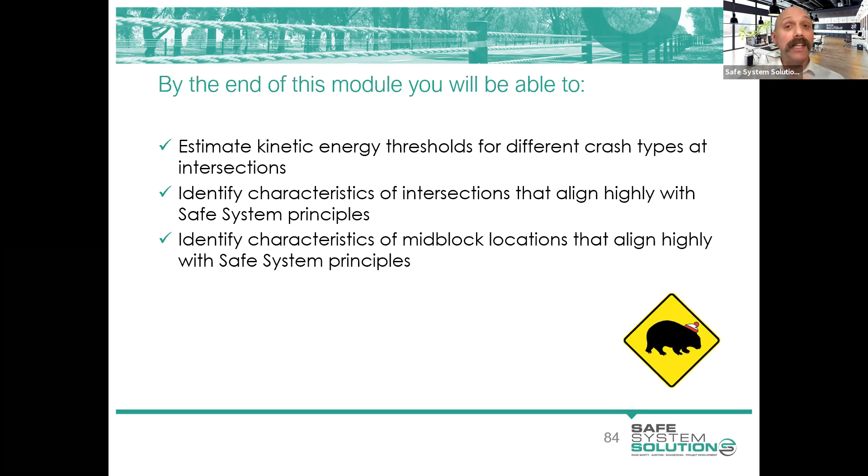So I talked to you, and I showed this yesterday, and I grabbed it from here and I popped it into the first set of slides, which was a little bit not following what your PDF notes are, but I wanted to do it to set that context. We saw road safety audit, design review, safe system assessments, safety and design, and the DDA, or Disability Discrimination Act audits and those sort of things, and the overlap with them.

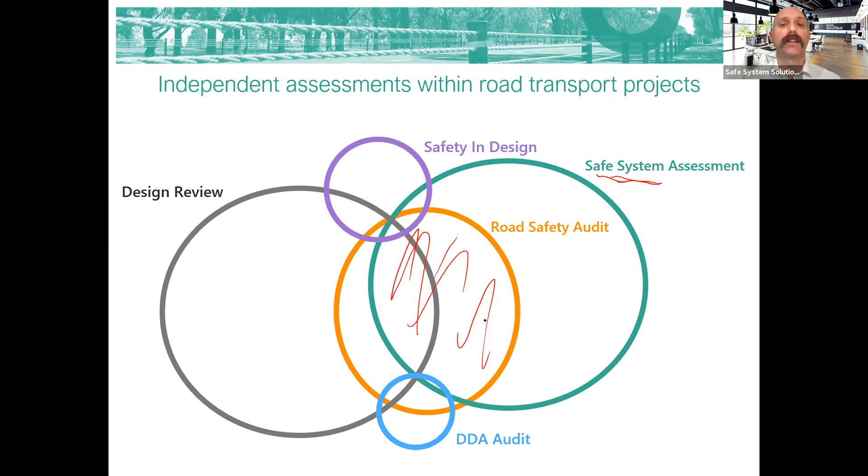And really, we're going to be spending our time today looking at this safe system assessment framework, but some of the stuff you'll definitely see really interacts in there with what you know as road safety auditors, for those that are road safety auditors, and it's very familiar processes, and analysing designs and the network in terms of that safety lens.

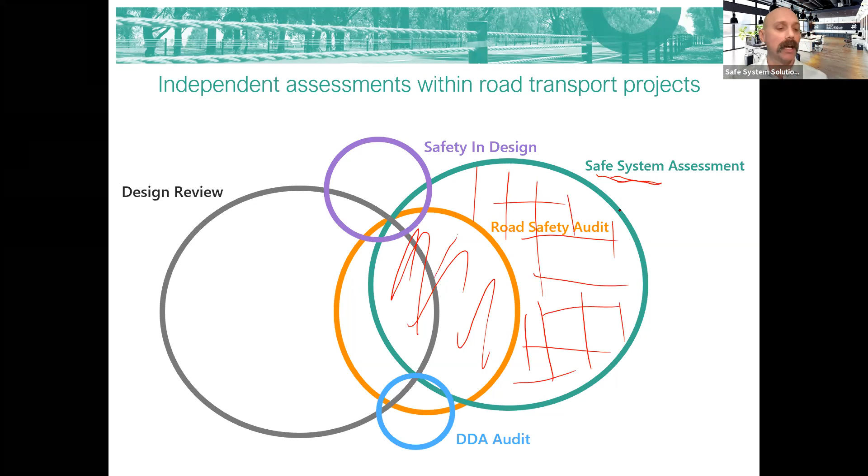The additional stuff out here that isn't within a road safety audit is a lot of the stuff associated with quantifying, scoring, categorizing things, and categorizing both the issues that are being identified, but also the recommendations that are being made into their principal safe system recommendations, or supporting safe system recommendations. We'll get into that, and I think a lot of you will be quite comfortable with a lot of the stuff we're talking about, because it is in the infrastructure space pretty much.

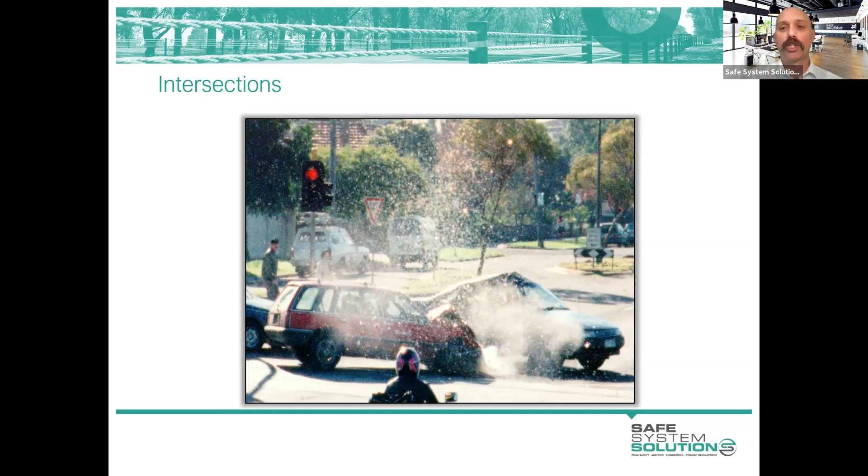Of course, there is interaction between the other elements of the system, which we'll talk about, but the last module was more that general principles and all of those elements, and we've now grabbed an element and we're working with that. So I'm going to start with intersections, and I'll move to mid-blocks shortly after, but I'll be asking you a number of different questions as we go.

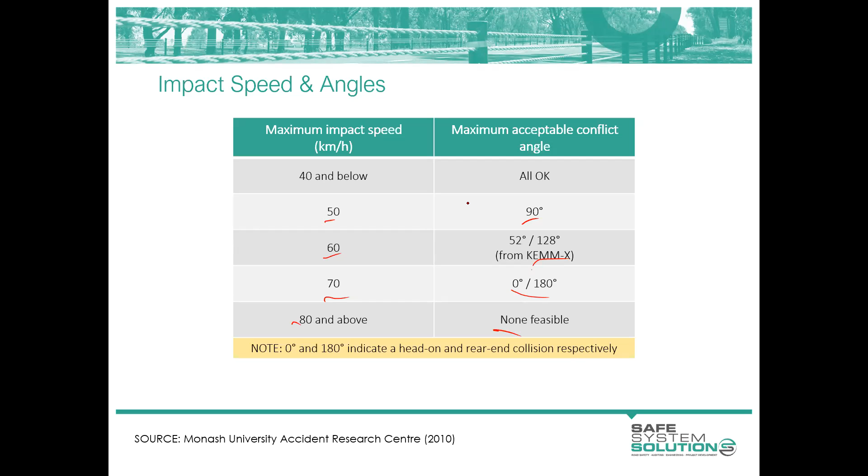Yeah, thanks, Ken. Based on what you presented in the earlier two slides, there has been some discussion regarding roundabouts for safety for cyclists in particular. In the general traffic engineering guidelines, we tend to say that a roundabout reduces the angle of impact, as well as reducing the number of conflict points compared to a normal cross intersection. But if you look at the Bicycle Network website, they say they don't like roundabouts at all in terms of providing safe intersections for cyclists. So I just want to hear your views on those. It's a wonderful question.

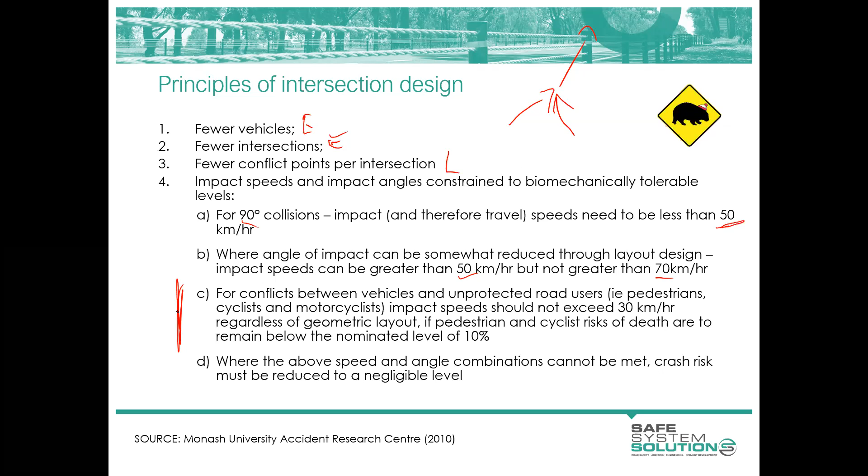And I suppose if you look back to this one, we see there that the cyclists and pedestrians were sat out on their own, and they're not associated with an angle as such. Because you don't get that advantage you get from passenger vehicle angle deflection of energy because of the vulnerable road users. So this table is really just for passenger vehicles.

And then I've got a table, I think, next week where we talk about including the pedestrians and cyclists in there. And really you just take that 30 kilometre per hour as the exponential increase, regardless of angle or the like. There's a bit of work being done in trying to understand some of the severity outcomes of crashes with cyclists in bike lanes or facilities where they're travelling along at speed and they're struck from behind, and how that plays out. But cyclists and pedestrians have a multitude of challenges associated with being run over by different vehicle types. And we can see some fairly low speed things happen that have very severe outcomes.

Yeah, so we'll talk a bit next week about, in fact, next week is all about pedestrians, cyclists and motorcyclists and facilities with them. So I'm going to delve more into that then, but I really appreciate you mentioning it to clarify in everybody's mind. We're talking on this table, passenger vehicle crashes.

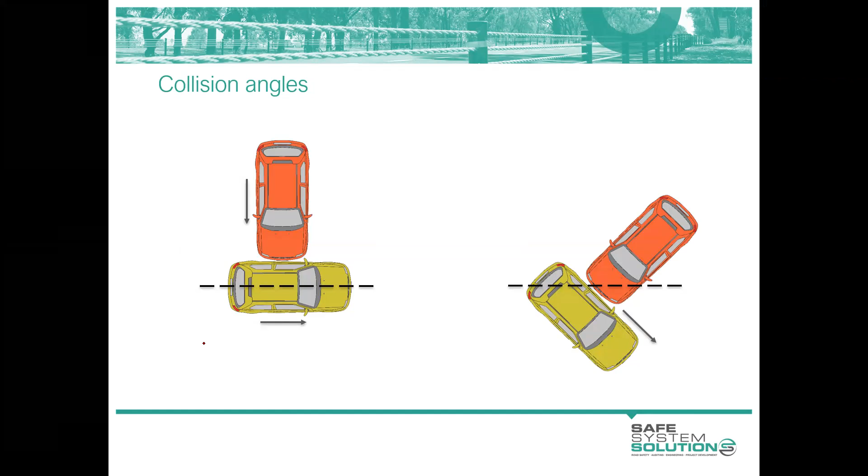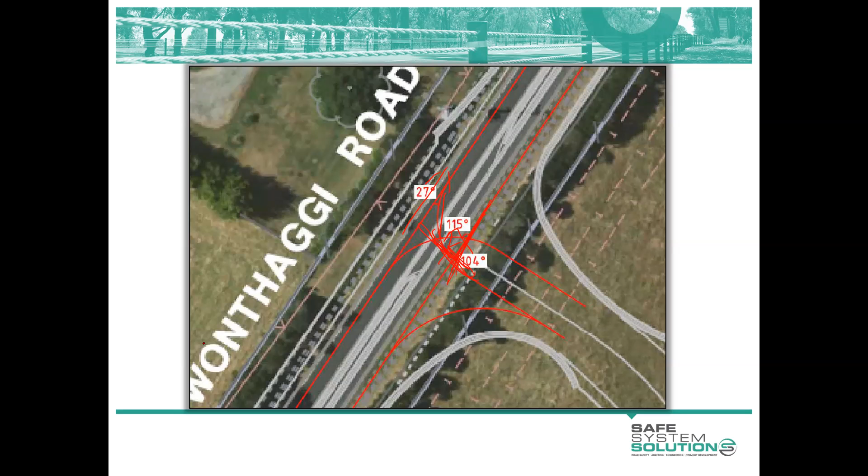There's a comment from earlier on as well when you're talking about intersections where Wade's asking, aren't fewer intersections also fewer conflict points? Well, yes. You eliminate all the conflict points of the intersection you remove in one way or another. So you're spot on, Wade. Absolutely.

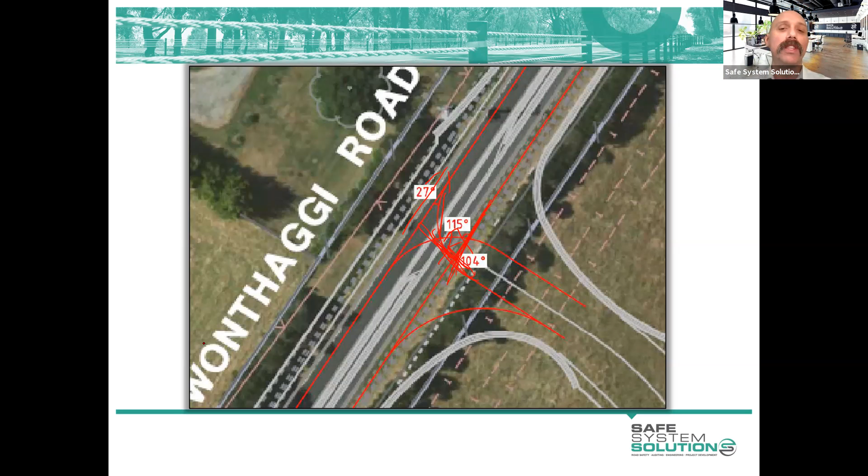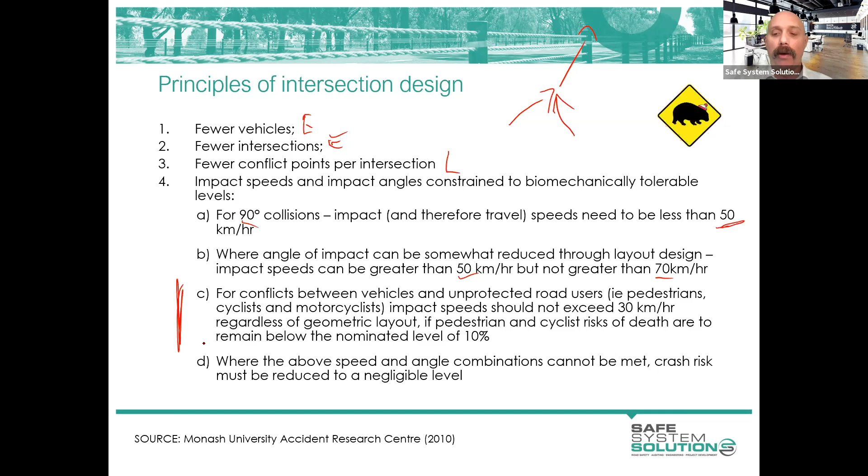I suppose the intent within the MUARC document was thinking more things like making it a left in, left out style treatment, or alterations to make it like a roundabout with less conflict points. So you've got an intersection there, but it's just got less conflict points. But you're spot on. I mean, it's less by going to zero.

Collision angles. So we talked about angles and vectors and the like, but I also just wanted to mention secondary impacts. Often at an intersection we'll see the rate of crashes of lane departure, so run off road or even head on, can sometimes go up a bit. This is because we might get a vehicle that comes out here, and the vehicle with priority then avoids or clips, or there's turbulence at that location, and we often have power poles, signal poles, other roadside features around the intersection, drainage, culverts, and all sorts of things. It's quite a spot for infrastructure.

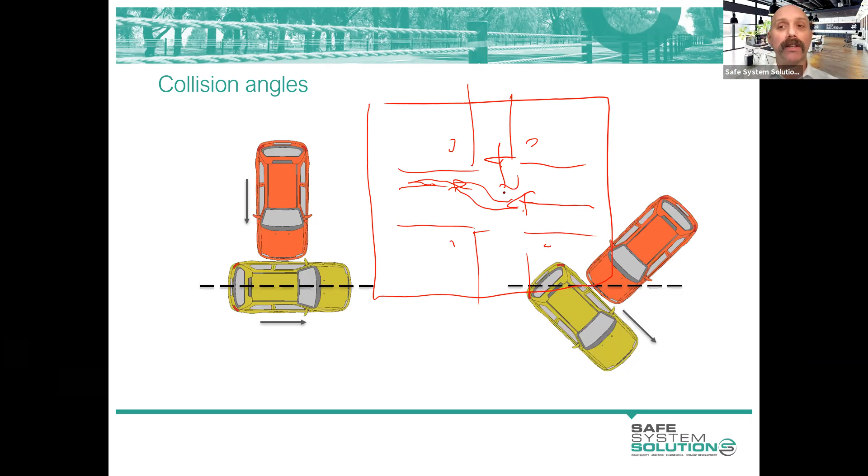And so when you're doing a safe system assessment, while you might be considering the intersection, and there's different definitions of what an intersection is, back to right of way, regardless of that, you're thinking about the crash type. It doesn't particularly matter where it's happened on the network. So if this vehicle went to avoid one coming here and there was a head-on crash, even though it happened right in the intersection, you would categorize and score it as a head-on crash in your scoring matrix. So what we often see if you're doing a route is that the intersections actually step up the run-off-road risk a little bit, as well as the intersection risk.

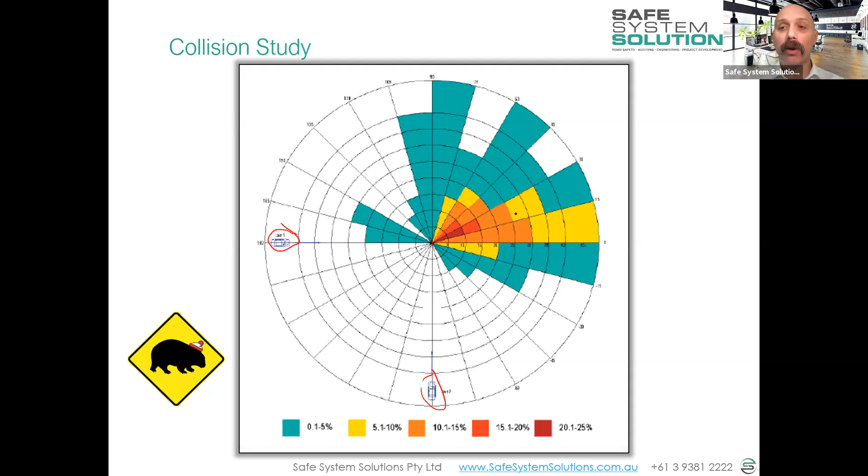The second thing here is a diagram that the Centre for Automotive Safety Research in Adelaide came up with after a lot of investigation of different crashes, and they're talking about secondary impacts here. Here's a vehicle, this is the intersection point, and it's shaded where the secondary impacts are occurring. Pretty obvious stuff, I think. You're going to get the crashes out there, but you do get them in other locations. But there are quite a few secondary impacts there.

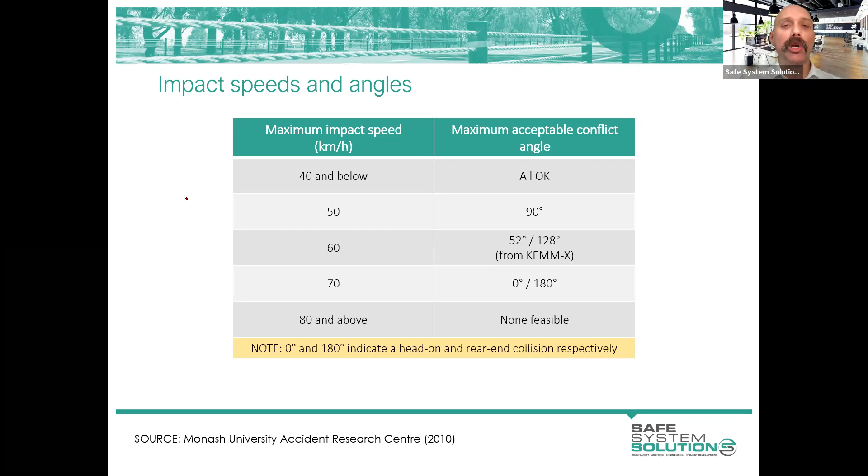So you will be referring back to this and some more information I'm going to provide you to aid you in scoring severity. I'm going to get you to do an exercise shortly, but you're going to have to remember the exposure, the likelihood, and the severity, because what I'm going to ask you to do is come up with ideas on treatments, but put them into the categories of: is that influencing the exposure to crashes, so the number of vehicles that are going through the intersection?

Is that influencing the likelihood of crashes? So features that may influence that are things like the line marking, signage, sight distance, or the like. Or is it going to influence the severity in terms of the speeds, the angles, the vulnerability of road users out there, the types of crash, side impact, or that? Is it a point source hazard like a tree or a power pole, or is it a wider hazard that they might be rolling over, or the like?

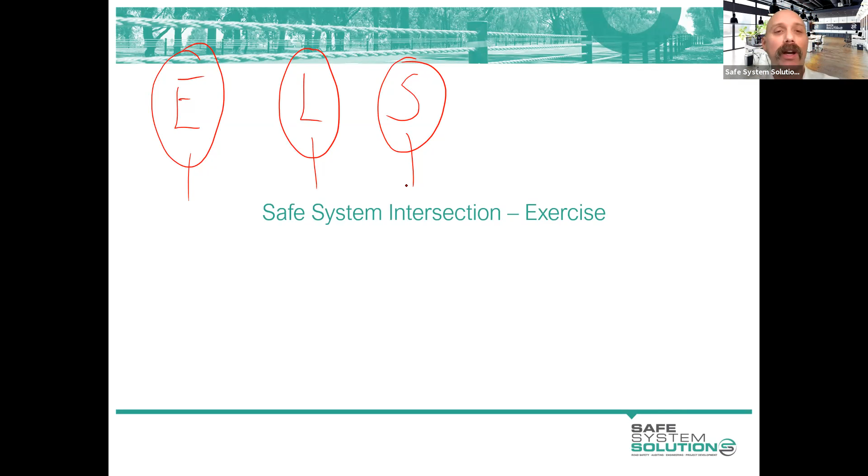So you're going to be asked to categorize anything you come up with. So it's not going to be just as easy as coming up with ideas. You're going to have to start categorizing them. And that's what you have to do in a safe system assessment anyway. So I'm going to use this random intersection as an example. We could have picked anything, but here we go. We've got an intersection here. It's on a major arterial road.

It's got 19,000 vehicles a day. Can I write that there? So 19,000 vehicles a day. It's got 11% heavy vehicles. It's a B double route. It's taken big vehicles. It's got buses. That's a bus stop there. 2 lanes in each direction. 70 kilometers per hour is the speed limit, and the 85th percentile is somewhere around that 70.

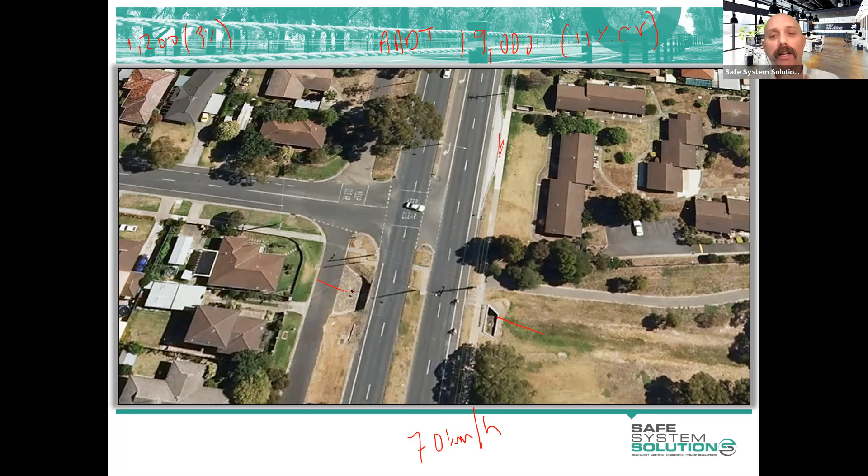So it's generally that. So the side road here is much lower volume, so it's only got 1,200 vehicles a day, and it's only 3% commercial vehicles, and they're predominantly service vehicles, the rubbish truck and those sorts of things, and the buses that go to a school down here. And the school's about 400 meters, 500 meters down the road there. This is a big drainage culvert thing. Looks like a lot of water coming from somewhere that goes under there. This is a shared path facility here.

You can see sort of a bit of a Danish offset crossing here, a Z crossing, as some people call it. And what else can I tell you? This is a 2-way service road here, just really access for the houses. 50 kilometre per hour default speed limit on the side road. Now, what I'm going to get you to do is get this intersection to align much more highly with safe system principles, as high alignment as you can possibly get. But I am going to put some constraints on you. I know you wanted complete freedom to do absolutely anything you wanted, but I'm going to put some constraints on

you. The first constraint I'm going to put on you is that there's been lots of consultation with all these residents in the residential area. Unfortunately, the time it would take them to access via other routes means that we cannot close this intersection. And we can't eliminate those conflict points, as Wade said. We need to actually provide access in all moves. They need to be able to turn left and right out and turn in via left turn and right turn. And they can't go too far up either direction to make a U-turn on the light. So we've pretty much got to leave this fairly open.

That's your budget. And the final one is that you are operating in the current political, organizational, and community environment in which you currently work. Okay, so if you're putting forward something that's very radical, I want a bit of a plan as to how you might actually get that onto the ground, or run that campaign, or whatever you're planning, because that's real world. So I want you to try and think through all of that and come up with treatments, and then categorize anything that you recommend in terms of this will influence the exposure to crashes, or this will influence the likelihood or the severity, or maybe a combination.

Now, does anybody have any questions about the intersection, about the scenario at this stage? We've got some requests for your instant quoting system, Ken. All right, let's do it. Roundabout cost, please. Roundabout's going to be $5.4 million to get a full-sized roundabout at this location. It involves service relocation, property acquisition, big works. 5.4 million. You can't afford a full-size roundabout.

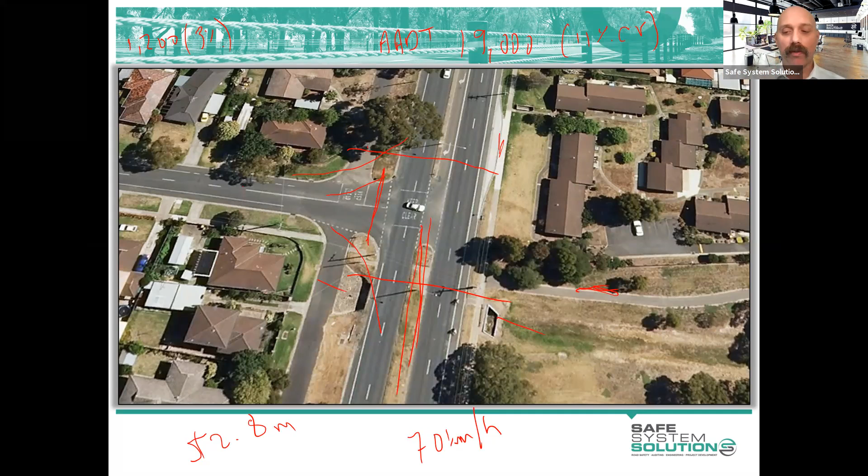A slip lane would actually probably alter the likelihood of crashes up a bit. Slip lanes aren't a real friend in road safety. The addition of a wombat crossing or the like on the slip lane would then bring things back. But thank you all for that input. I'm going to utilize a lot of that input as we go through a few more things, and we'll come back and talk a little more about this intersection. I'm glad most of you have got your head around exposure, likelihood, and severity, because that's the meat of a safe system assessment, really. Well, you have to quantify a few things and the like.

So, a number of you suggested traffic signals. As I said, that is a likelihood influencer. You're less likely to crash at an intersection if it is signalized. But when the crashes happen, they're often just as severe because they are red light runners, sometimes even more severe because they put the foot down to try and get through. People will miss the red light. They will run that red light. The angles are pretty bad. The number of conflict points are there.

You'll notice in my little diagram, which I pop up a lot, that it does nothing for exposure. That's a common mistake when people are getting into safe system assessments, to say, well, if we put a red light, then people aren't exposed to the crash. Well, they are when they run the red light. And that's part of the safe system, to say that people are going to make mistakes. We don't condone it. We'll do everything we can to stop them with good sight lines and LEDs and mast arms if we need. But even if you get all that right, unfortunately, people run the red light, and we need to start thinking about the severity of these crashes.

In fact, here's a little heat map I did of the outer metropolitan Melbourne area out in the southeast. I just picked a random one. I could have done this for any city in Australia and any outer metro area, basically. This is fatal and serious injury over a 10-year period, I think. But look at the hotspots. These are all signalised intersections. That one, I suppose, is the approach to a signalised intersection. We know the biggest source of death and serious injury at intersections across the country is large signalised intersections.

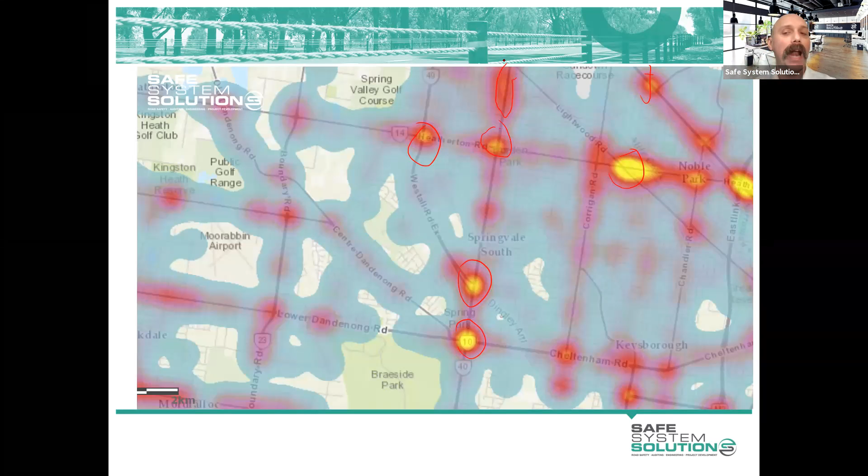And a lot of you popped in signals for some very thoughtful, I suppose, knowledge in a traffic engineering sense. But are we thinking about the outcomes there? Some of you started out by wanting a roundabout. And as En said there, the roundabout is an advantage from a road safety perspective in terms of lessening the conflict points, improving the angle of crashes,

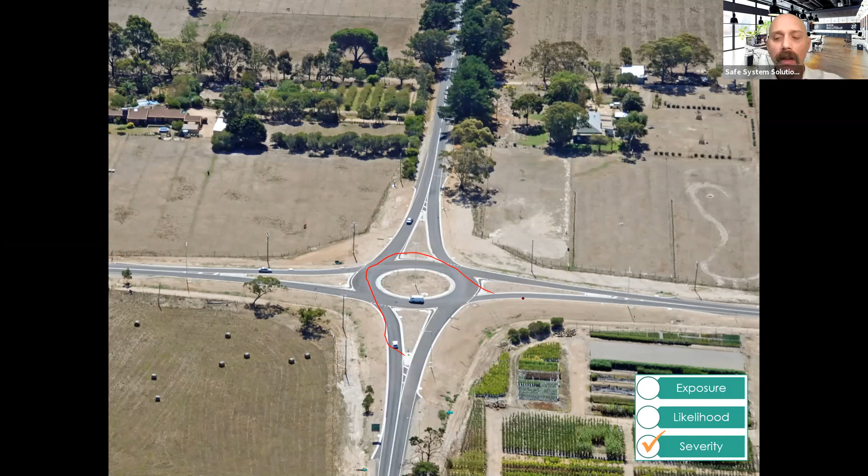but we traditionally need a large area for a roundabout in order to get large vehicles around it. A big vehicle with a swept path needs quite a bit of space. And the bigger you make your roundabout, the easier that is, obviously. So the costs start to blow out when we get these full-size roundabouts. But nonetheless, they provide great value. But do we need roundabouts as big as they are, is the question I pose.

And some of you will sort of recoil at the sight of this and say, well, you can't do that. They'll take a straight line through that fast, and you've lost all the advantages of the angles and all of these things. But obviously this is a very different environment to the one we were looking at, and let's not lose sight of one thing in these sorts of environments with a roundabout.

And it's pretty critical to our way of thinking about intersections: nobody approaching this intersection, no leg, believes that they have ultimate priority. And that becomes important in how an intersection is managed. We know that a lot of the problems with intersections are where we have a priority leg who are switched off and just driving along at speed, and then some mistake has happened on the non-priority leg. Now, if you can say that nobody has priority until you've worked it out in there, we see an immediate massive step up in road safety outcome.

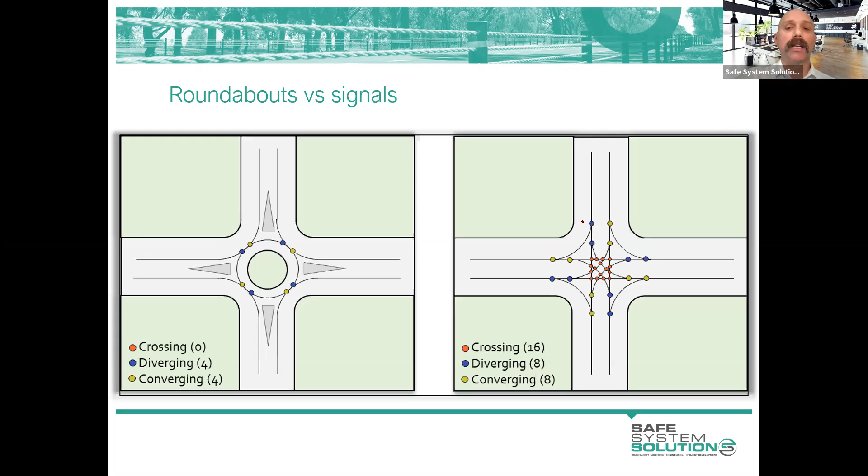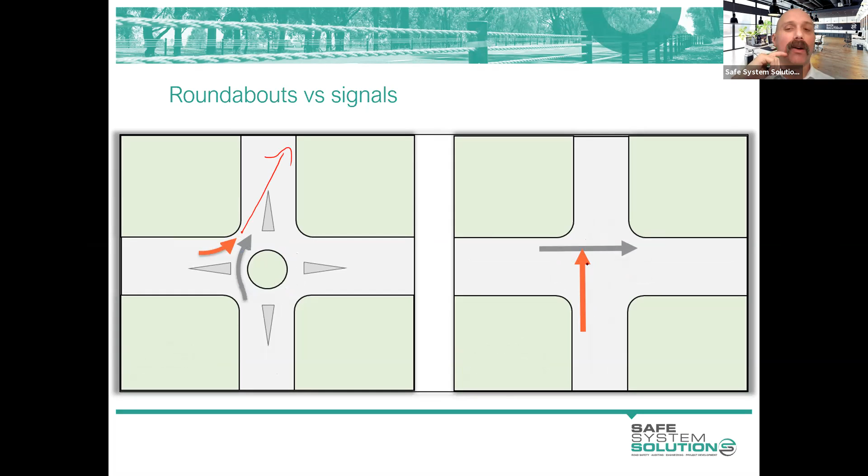But signalisation or other priority controls have a lot of ways that you can crash. The angle of crash is much better in this, because energy is deflected out there, as opposed to the energy within that other crash.

And this is my one to say that when a driver who is half asleep, worked a double shift, maybe on drugs or drunk or whatever, all these states that people drive in, which we don't condone, but you've got to say there's a hell of a lot of that happening. When there's a large lump of infrastructure in the middle of the road, they wake up, they look around, they slow down. It's very, very rare that somebody runs through a roundabout not recognizing that it's an intersection there. It wakes them up.

Although if it's just a set of traffic lights and a red light, they run straight through it. Some people don't even know that they've done it. And I won't make you put your hand up if you've gone, hang on, did I just run through a red light? You wake up from your daze, no memory of driving for the last 3 minutes, and just go, what just happened? People drive in all sorts of states.

We've got to work on that in other areas, but don't get me wrong, for the rest of our careers, we're going to have people in these states driving. We need to alter the infrastructure to try to alleviate this, or alter the vehicles, alter the system around these people, because getting everybody out there to drive in this always alert, always compliant manner is not going to happen.

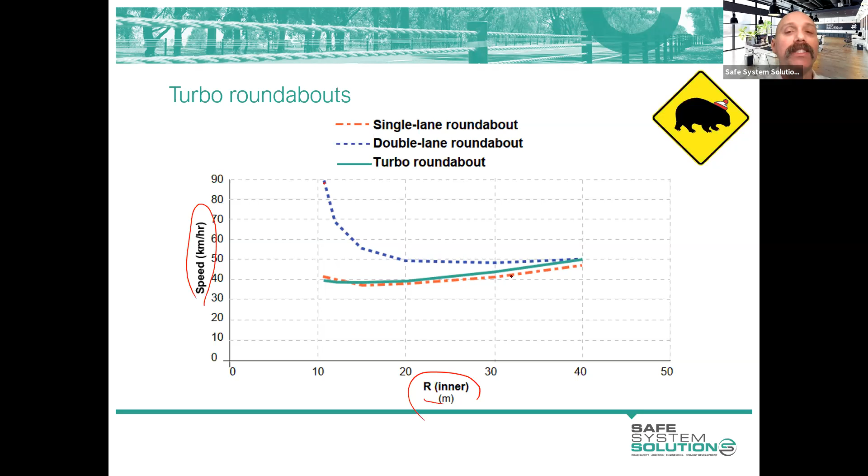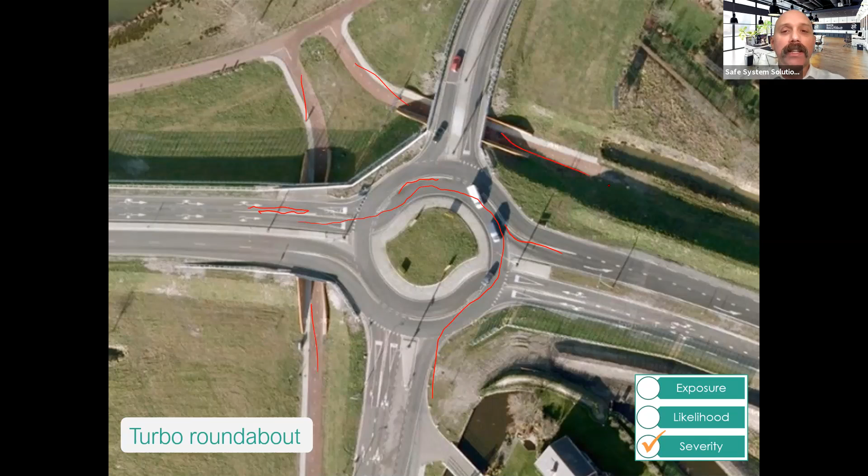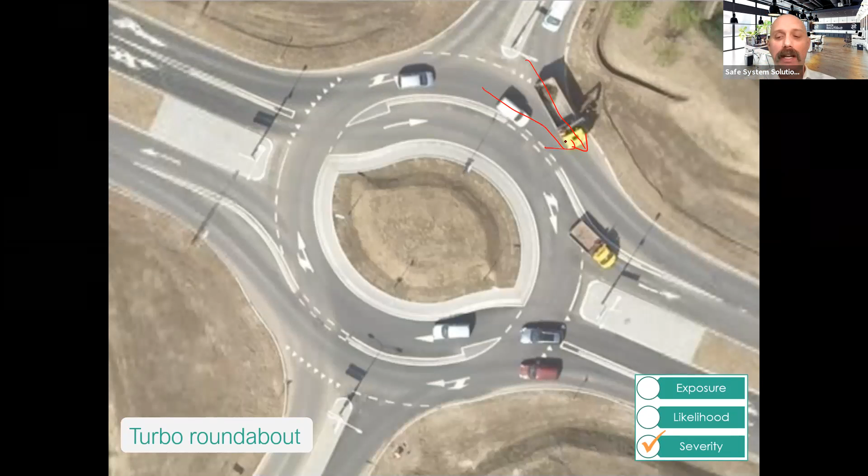Look at this nice one with the bicycle facility going underneath. Isn't that just luxurious? I love it. It's out of the Netherlands, of course. There's another turbo, and you can see there, look at the beautiful angle on that conflict there. And the speeds are slow, and we know that everything will be fine with whatever happens. But there's turbo just for fun, and I love this one. The Netherlands, chucking in their massive turbo roundabout here.

And I was talking to a Dutch engineer a few years back. We brought them over to talk about cyclists at intersections and roundabouts especially, and how you can alter roundabouts to cater best for cyclists. And I showed him this slide and said, this just fascinates me. What a massive land take. Here in Australia, with two big arterial roads like this, we would probably just have it as a large signalised intersection.

It might, unless it was grade separated, but it would probably be a large signalised intersection for a good while. And the Dutch engineer's response was, but what about all the death and serious injury that would happen? I'm like, yeah, I know. I mean, it just could not compute that you would possibly run two high-speed arterial roads at right angles with these high volumes at speed. It just boggled the mind. We would just take it for granted.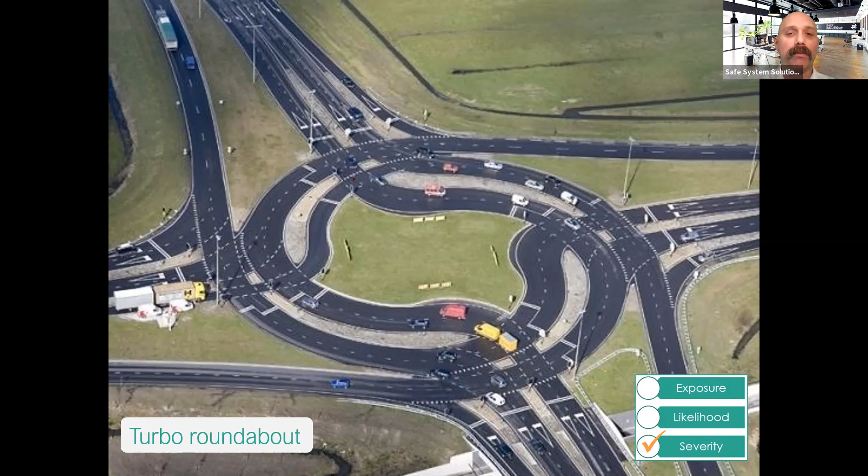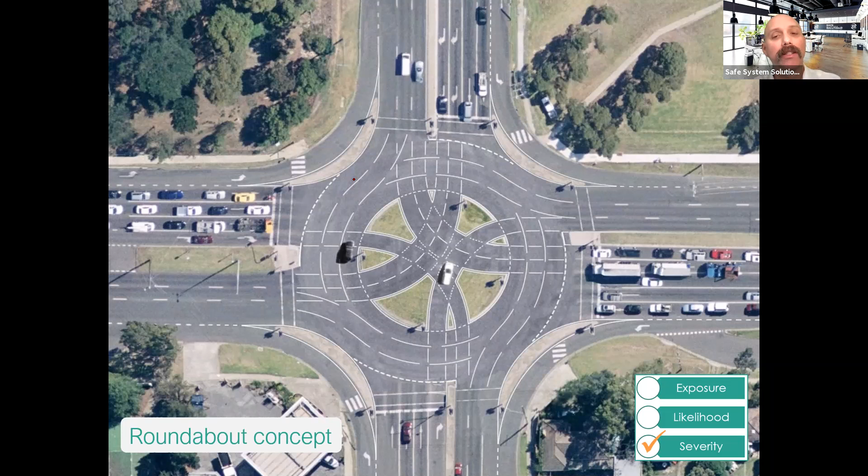And it's really interesting to see some of the concepts coming up for these outer large signalised hotspots for metropolitan Melbourne. This was a concept. This has not been built, but there's really great merit from better alignment with safe system principles for something like this. Again, it looks complicated from up here, and probably why it hasn't been built, because design committees get scared with these sort of things.

But every vehicle approaching this is going to have to slow down, is going to have to alter their angle if crashes happen, are going to wake up that they're not blindly sort of running through this intersection. And those who have travelled through signalised roundabouts know that you wake up, you're more alert, you're looking around. So I think we need to continue to look at this, because we must address that severity at these intersections.

And that's one of the things with all the answers that were coming in. There were some people who were trying to address the severity. We saw a lower speed limit there, and people were attracted to roundabouts at the start, but they couldn't afford it, or they were worried about unbalanced flows, but we really must start to address the severity at these sorts of intersections.

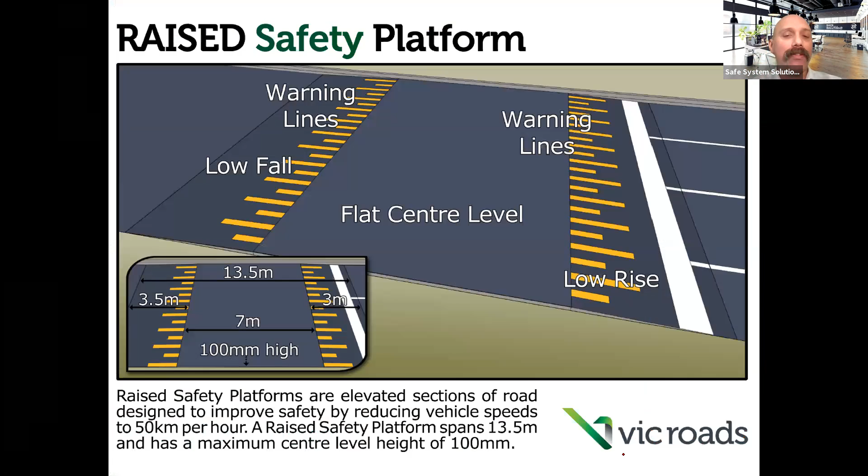And one way to do that is to start looking at these raised safety platforms, and they address the severity. So the platform itself will address severity. We generally classify it as severity. The traffic signals, if you're placing them around it, also influence the likelihood. And that's what they proposed at that intersection that you were looking at. And they proposed their signalisation, which gives us our likelihood, and severity addressed through the raised platform.

So while a lot of you are extremely good traffic engineers and understand a road network and traffic and operations really well, and you were spot on that everybody went, signalisation is probably what needs to be done here for the unbalanced flow, for a number of different reasons.

But our commonplace then is to stop at that signalisation and think that, well, people shouldn't run the red lights and hopefully everything will be okay. And we put a fully controlled right turn. So we've done almost everything, put a red light camera, but we must address that severity. And so they've gone and said, raise platforms.

Could we do that? Now, back when I started as an engineer at VicRoads out in Traralgon many, many moons ago, if I had suggested doing raised anything on a major arterial road, I would have been told to sit in the corner for the day and think about what I just said. But we've evolved from that. We understand now that this is not an urban speed hump. This is a device to alert people to the change in the road environment at this location, to slow people down on the approach to it.

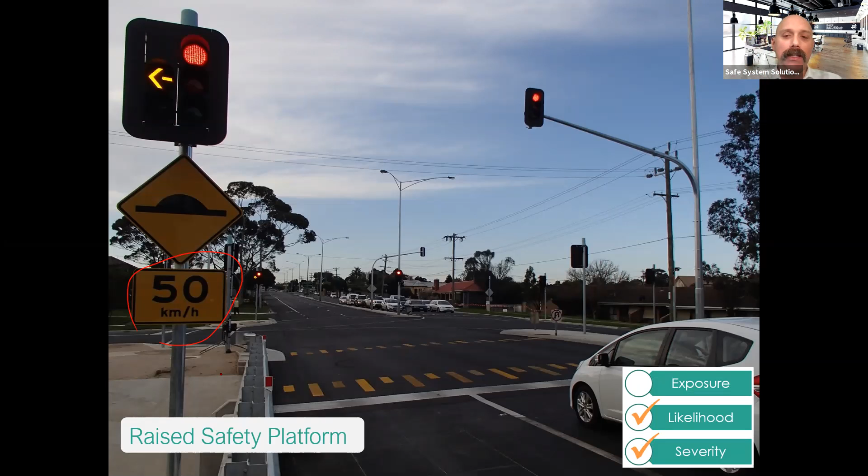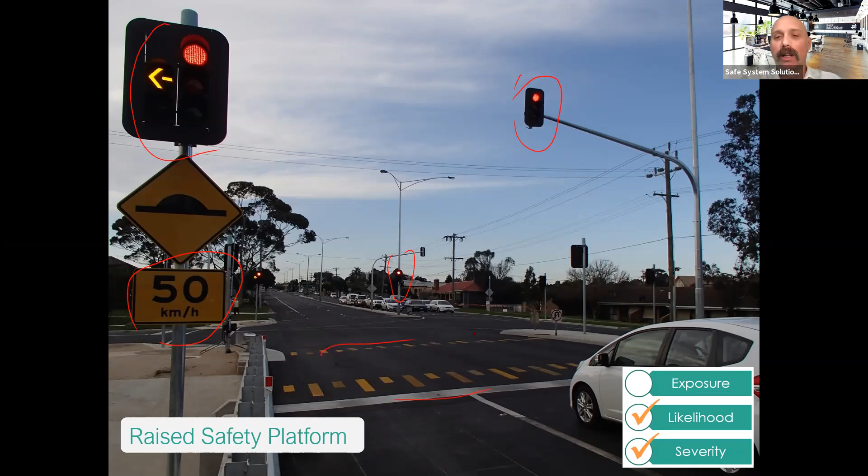But yeah, it really, to me, says this is how we need to start thinking about likelihood, check. Signals. Severity, not being ignored anymore. Managing the speed, utilizing some raised platforms. And we see, isn't this a beautiful picture? That vehicle slowing down on the approach to a green light. Okay? From a road safety perspective, we are just having massive wins there. That's just wonderful.

Also, in terms of the dilemma zone, so the dilemma zone is basically that point as you're approaching a signalized intersection and it goes orange and you are in a dilemma. Do I put the foot down or do I brake? There's lots of fun literature on dilemma zone, but we know that these platforms reduce the dilemma zone because most people are going to stop because they know that they're going to have to navigate over this raised platform. So again, wonderful benefits from this sort of stuff.

But people are so reluctant to do this. And I know these sort of discussions with my New South Wales colleagues, and I know I've got a few there. It's the traffic ops people who are so against these that we need to continue to push and continue to question these decisions to operate large signalized intersections.

And I held myself back on LinkedIn from getting really stuck into the removal of a roundabout for a set of traffic signals in one of the regional towns in New South Wales, and everybody was cheering, yay, we're improving the transport efficiency through this. I really want to get into that and say, well, you're going to kill and seriously injure people here. That's a decision. You just traded off the health and safety of your community to get a little bit more travel time efficiency there. And that just does not align well with safe system principles. It doesn't align with the ethics of safe system.

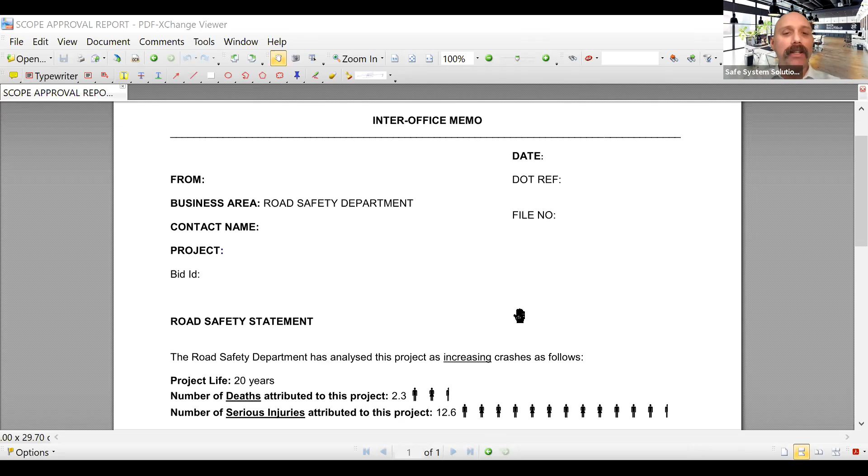In fact, I'm going to go slightly off script here, Kathy, and I'm going to show a little memo that I used to do at VicRoads, and then I'll pause for questions as well. This was in the road safety department, and there was a mass congestion easing program going on. It essentially was, outer metro, rip out roundabouts, put in traffic signals, getting massively high BCRs for traffic efficiency. And we were like, this is not right. And so we started producing this memo, and this is a template of it, which I kept.

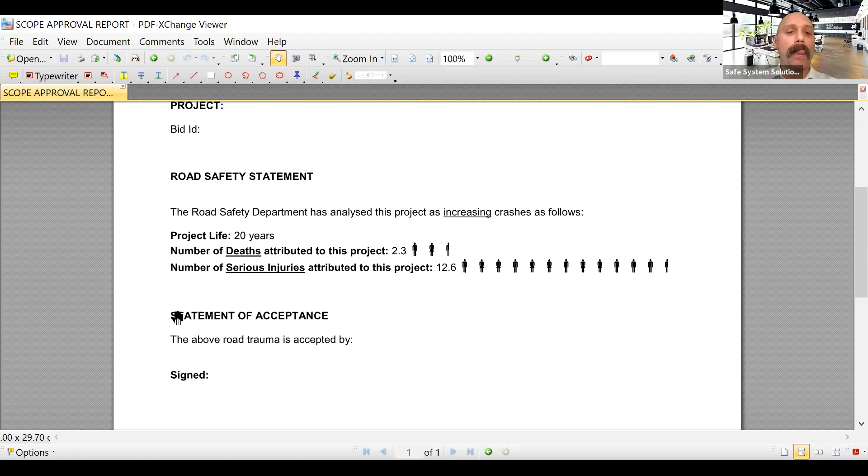Road safety statement. The Road Safety Department has analysed this project as increasing crashes as follows: 20-year life, the number of deaths attributed to this project 2.3, and little people to remind, we're actually talking about people here. Number of serious injuries attributed to this project 12.6. Statement of acceptance: the above road trauma is accepted by. We used to try to get the regional manager or regional director to sign off, knowingly killing and seriously injuring that amount of people.

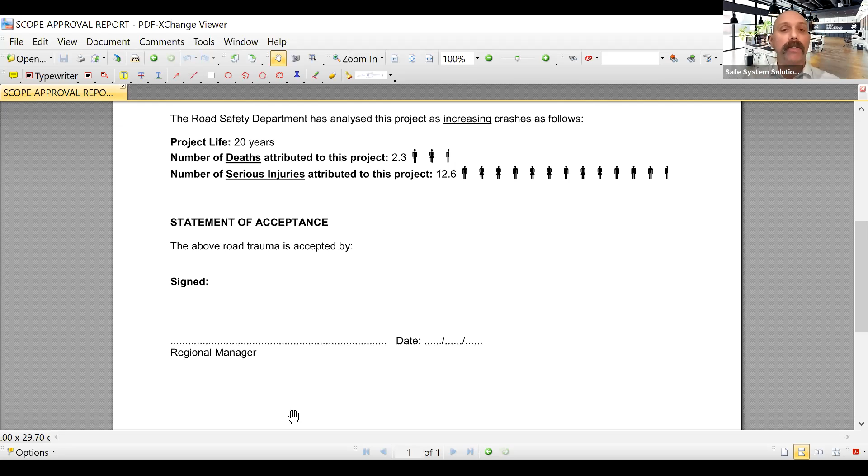Of course, we never got any of these signed, and we got very stern talkings to about not understanding the complexity and balancing of a road network and objectives. But we need to boil it down to this sort of clear cut. Right, you're going to make that choice. You want to get a bit more efficiency out of your network, but by killing people, well, sign off on it. Do it. Anyway, I get a bit passionate about this one.

Anyway, we've seen some wonderful advances, at least in Victoria in this sense, and I'll show you what that is shortly. Kathy, are there any questions or comments at this stage? I've put up some pretty provocative stuff.

You have. Sounds like you're a challenging employee, Ken. Oh, yeah. Well, did I leave or was I fired? Yeah, I know. The story you tell and the reality might be.

Anyway, yes, there have been some questions. So just a clarification one on this road safety platform you've got here. So the raised platforms are used to slow vehicles and justify the advisory speed. Is that right? Yes. So, or to reinforce the advisory speed. It's the same principles as an urban residential speed hump in the fact that you're not actually using the ramp to slow. You want people slowing on the approach to it to comfortably be able to navigate that.

So these are done because this was a T intersection, as you remember. It's only done on the approach. I'm just gonna go back. It's only been done on the approach. I don't have a drone shot of it, and it's only done for these vehicles that you're trying to slow down. And why is that? That's because they are the bullet vehicles. They are the one that does the damage.

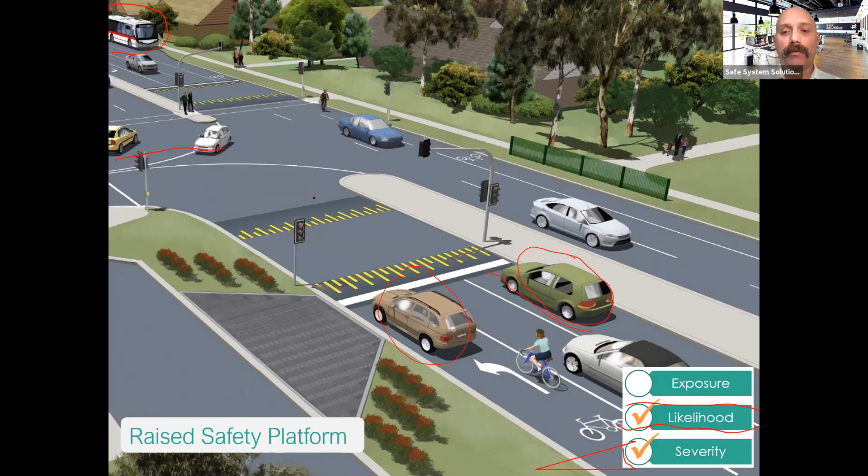These vehicles coming out, they're not the target vehicles, and they're not traveling at the speeds to cause death and serious injury. So you don't need to hamper their movement. And you're just simply trying to slow vehicles on the approach, and they navigate this at that 50. We're seeing likelihood and severity reduction. So,

Okay. Earlier there was a question, and you put up a couple of complicated looking roundabouts as well. How effective are they in wet weather, if you know? Yeah, so I don't know the answer to that. I mean, you're going to have all sorts of detailed things to work through, like heavy vehicles navigating them in terms of making sure there's not rollover, your drainage, and in terms of vehicles, skid resistance and the like.

But regardless of all those sorts of things, the slowing down of vehicles, the increased alertness, the less conflict points are all going to swamp those sorts of things. We should address those in the details of any designs and installations, absolutely.

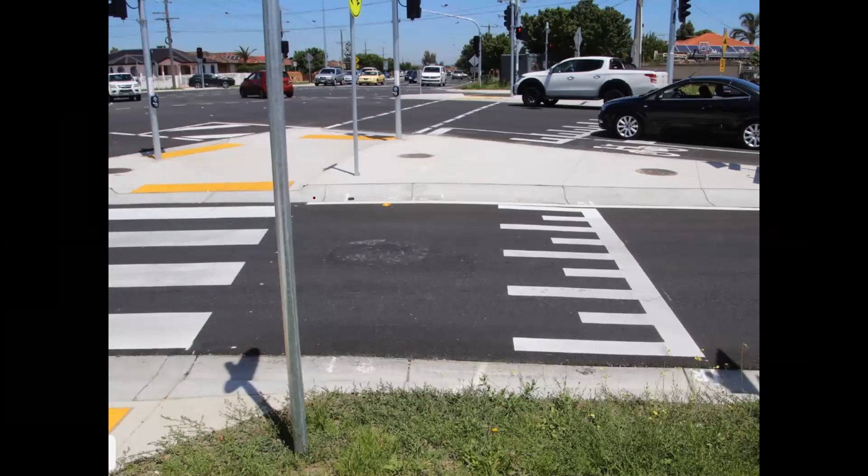What about metered roundabouts? Yeah, so metering a roundabout to me should be the first thing you do rather than ripping it out and replacing it with traffic signals. So for those who don't know what metering means, ramp metering is when you go onto the freeway on-ramp and there's signals and it sort of lets you through. A lot of our traffic theory comes from water stuff, your water meter and those sorts of things. But

you put signals on one leg of the roundabout to start with, and then on another leg to just manage your flow and to try and make it better. Absolutely. And in fact, that's what we need to be doing, is extending the life of these roundabouts out as much as possible, using signalisation and the like to keep those benefits before we start to move to these sorts of treatments.

Thank you. We'll just take two more questions at this point. One of the problems with TCS, I'm not sure what the acronym is, is the lack of information collected, such as approach speed. For example, all red time could be extended if a vehicle was detected approaching at high speed.

Yeah, so that is hold the red treatments, which was originally first done in Victoria. Well, I don't know if it was ever first in Victoria, but for those Victorians with us, you used to drive down the Hume and you'd hit the first set of signals at Craigieburn. And that had a horrific, I mean, it was 80 k's an hour or something that you were approaching that, and it had horrific issues with red light running and crashes.

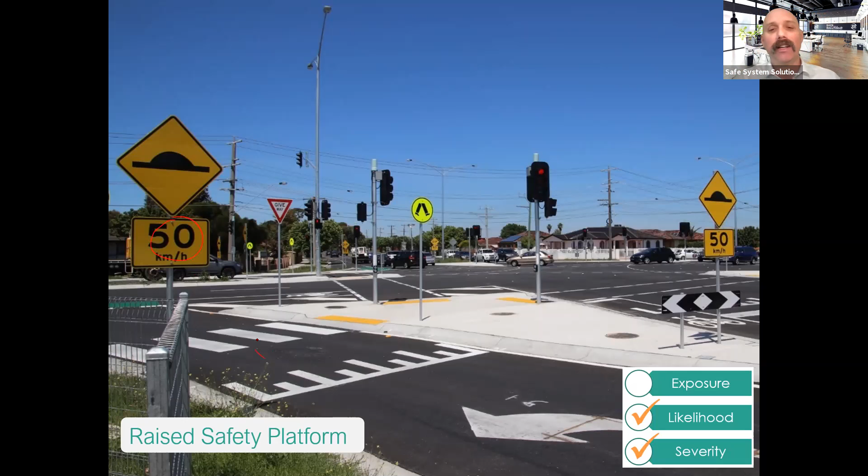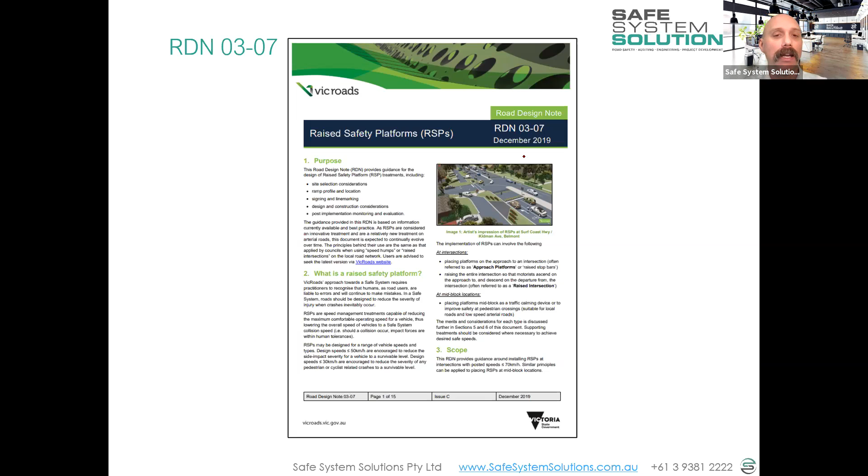bits and pieces. But those who are interested in some of those really specific details around the grade of ramps, different speed outcomes you want, the drainage, the consideration of different slopes and those sorts of things, I really suggest you have a look at this Road Design Note 03-07 produced by the Victorian Government. We've put that into your memory stick on Schoology. Have a read of it. Great stuff in there, and it'll really help you in a series of environments.

I'm just going to touch on this one, which is a considerably different road environment, very much one in these rural areas. No pedestrian or cyclist activity, and this is an area of high risk, 100 km/h in each direction, and an intersection, and the arterial road sort of goes around there. And this is a Telstra exchange building, which costs an arm and a leg to move, plus the land acquisition to get a full-size roundabout. It's a B-double route around this area.

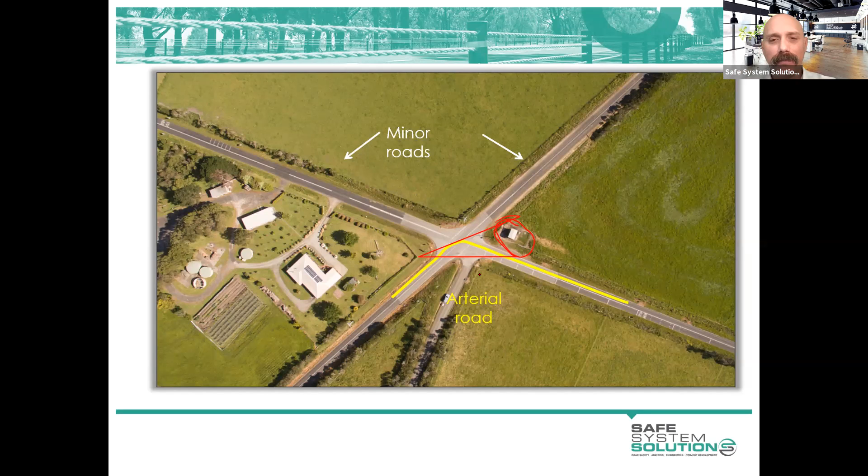So the region is saying we want to address the risk here, and how do we do it? Everybody wants a roundabout. We can't afford the roundabout. It has a huge land take and reverse curves on the approach, which is what is done in Victoria. The temptation would have been to go with just a right turn facility or something like that and reduce that likelihood only. But they pushed for that roundabout and, to try to fit it in with the constraints, went with a compact roundabout. So this roundabout is actually quite small.

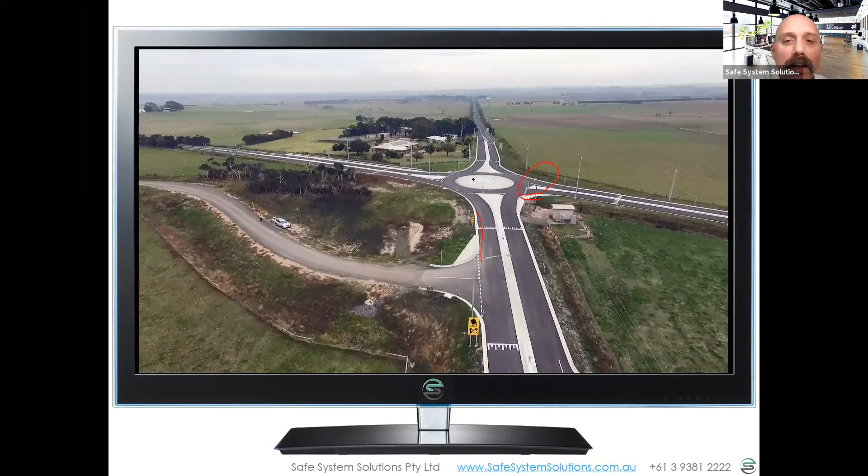It has straight approaches as opposed to the reverse curves. But again, they've used vertical deflection here, raised platforms, to slow vehicles down. And you'll see here, there's the Telstra thing that didn't move. And look at the tiny circulating bit of the roundabout. That's the roundabout. The rest of it is a concrete apron, so the large vehicles can sweep around that. But again, I feel it's important that severity of the outcome was the major factor in pushing for this, rather than the easy options, which would have been to address the likelihood.

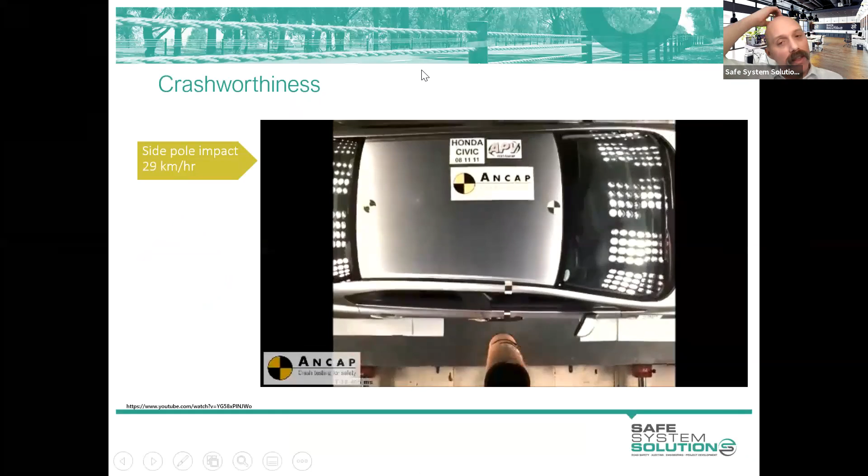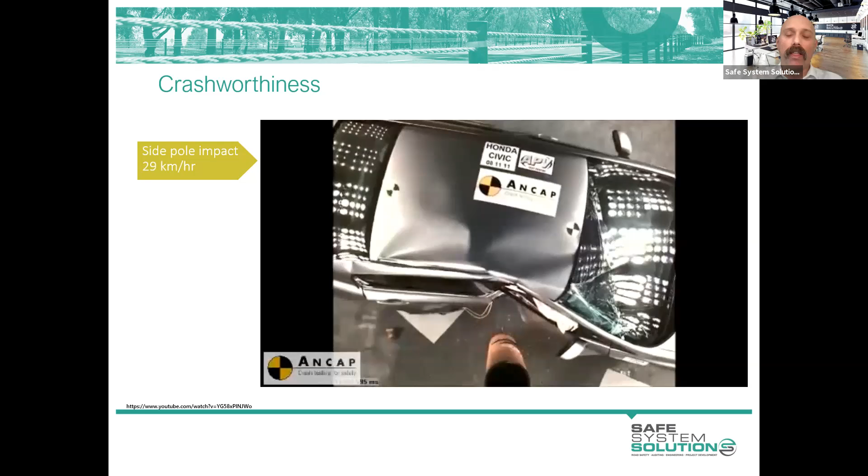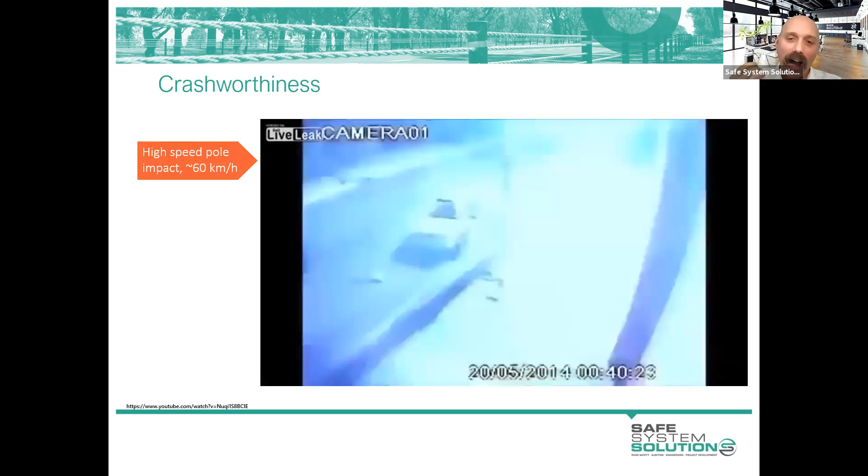But we know that roadside hazards are extremely severe in their outcomes. We talked last week about the ANCAP 5-star safety rating for side impact into a pole only being done at 29 kilometres per hour. So the presence of trees and power poles, if crashes happen, they are so severe, so violent. Here's one predicted at 60 kilometres per hour into a power pole. The violence of that, considering we drive 100, 110 around these all the time, and our safe system says mistakes are going to happen. It's just not a mix that aligns.

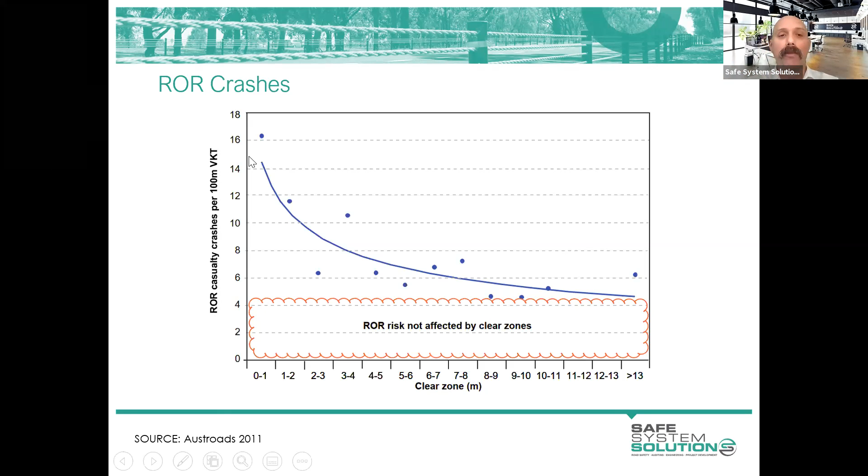I've got a number of different graphs here about the idea of clearing hazards in the roadside all the way back. And there's merit to that because it reduces risk. You see there the risk. This is clear zone, area free of hazards from the edge line out, and this is runoff road casualty crash risk per 100 million vehicle kilometres traveled. You see it goes down, but it asymptotes out. I've got lots of research and documentation around that for anybody interested.

But we know that these big wide clear zones and keeping clearing is not necessarily a safe place to be. We know people go beyond these large clear zones. We know rollover crashes happen even within these areas. So what we're saying is that wide clear zones don't have the highest alignment with safe system principles, and they're practically very hard to achieve with vegetation removal and all the legislation around that, and then the cost. But you do get advantage in the first few meters of clearing.

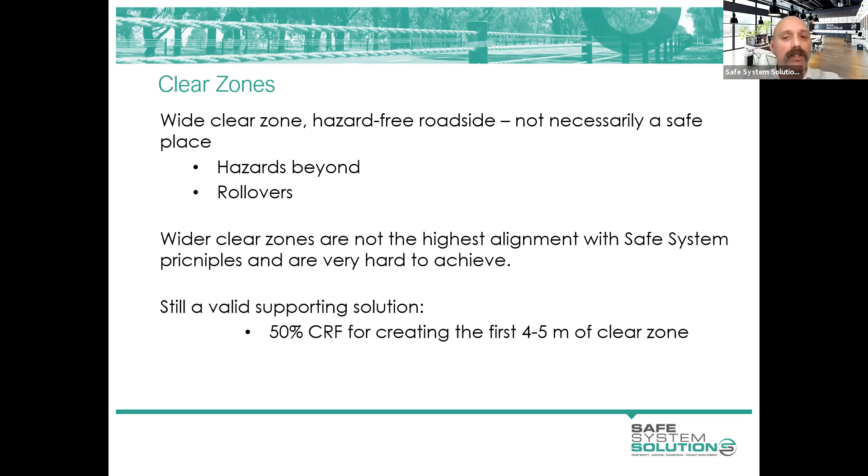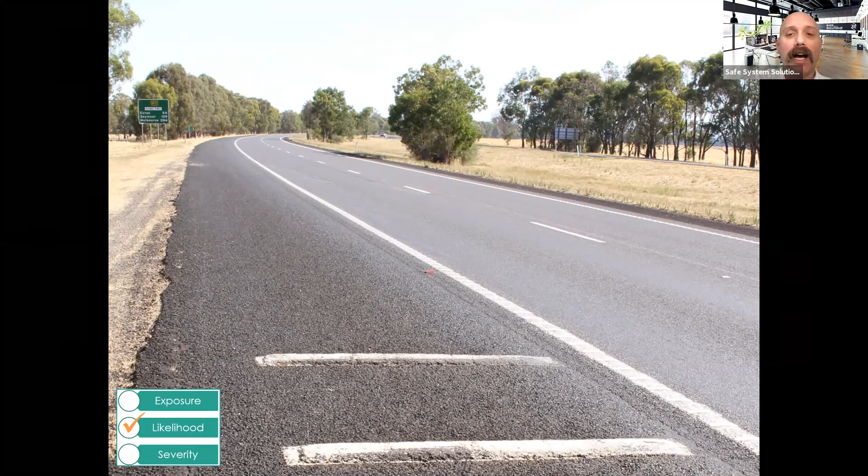But these sorts of roads, like this is Benalla bypass, right, which was built, I can't remember how long ago. But if you were actually to get the Austroads Guide to Road Design series from 6 months ago, in fact, from 3 months ago, it would take you down a path of building a town bypass duplication pretty much like this, which would have big sealed shoulders, audio tactile edge line, yeah, that's great. And you'd have all your hazards at whatever clear zone you calculated.

And the fact is here that all of the stuff associated with that is addressing the likelihood of crashes. The audio tactile, the sealed shoulders, the clear zone, median clear zone, the big wide median here, all addressing the likelihood of crashes. Luckily now, with the release of the new Austroads Guide to Road Design Part 6, we're starting to see more emphasis on severity of crashes, which is great.

And that's the document, and I really encourage you to have a look at that, because pretty much clear zones are gone. So there is no more looking at that table of clear zone and calculating your clear zone and saying, well, it's a 9 meter clear zone and that hazard is at 9.1 meters, so everything's okay. And that's great from a logical perspective, isn't it? I mean, the insanity of us ever thinking that a hazard at 9.1 was not a hazard and a hazard at 8.9 was a hazard.

I mean, we know that risk sort of drops off at different rates, and that is acknowledged in this, and there are lots of risk tables about how risk changes with different features, and acknowledging that it doesn't disappear at some arbitrary number, it just continues to alter in its path. So I think it's a sort of logical step, and we finally got there with the release of the new Part 6.

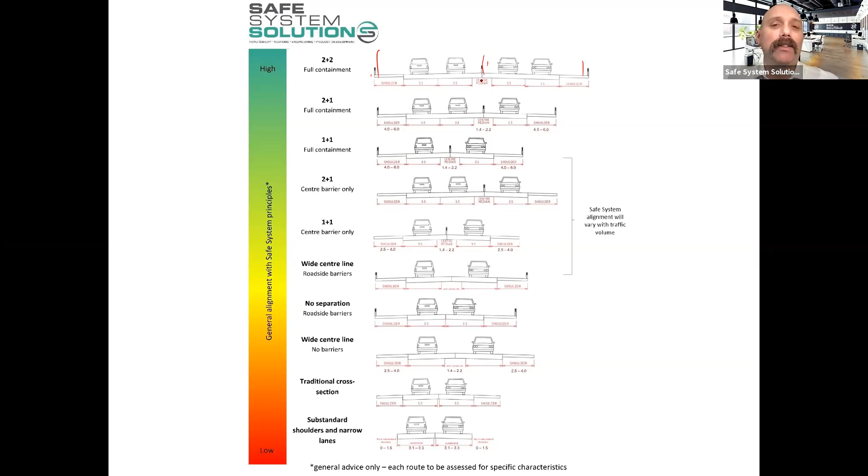And that's great alignment with safe system principles, because it just acknowledges that people are going to fall asleep. They're going to look at their phone. They're going to turn around to look at the screaming kids or whatever it is, and they're going to leave their lane. And what we need to do is manage that mistake. We're going to try and stop them making that mistake. That'd be nice. And we'll do lots of campaigns, but don't get caught up in that idea that our answer is to fix all these mistakes and stop them happening. We need to work on that, but we need to manage the energy of mistakes.

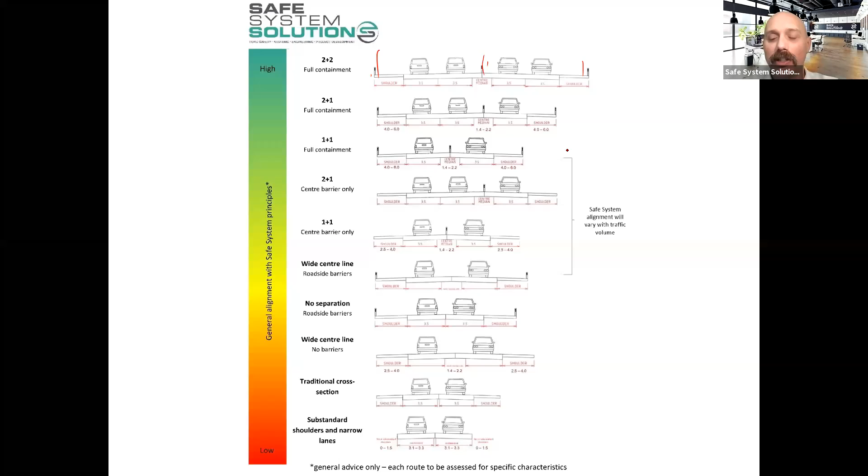And so it sort of goes down. There's different alignments with safe system principles as you get different volumes and a few other things. But those are just a general bit of an idea. And there are lots of different cross sections being produced. These are some of the New South Wales cross sections, and we won't get caught up in the details of offset to barrier too much and those sort of things. But isn't this one interesting? It's a bit hard to see there, but 4-star iRAP

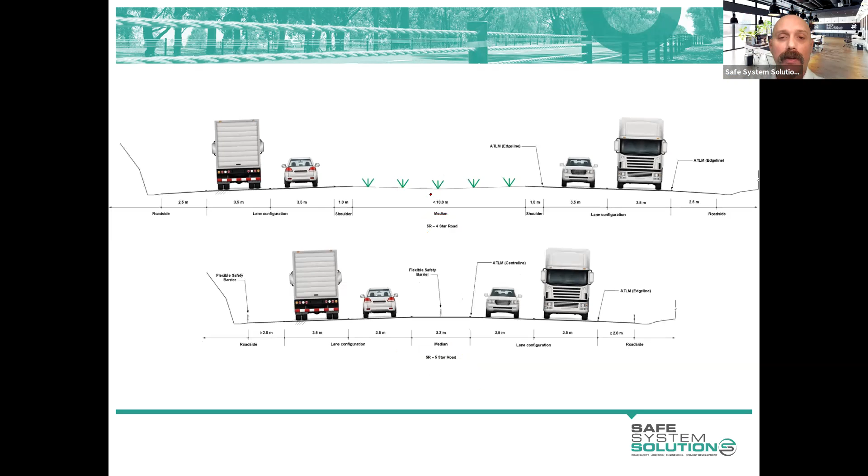and 5-star iRAP, and this is pretty much the way we were producing roads with the big wide median. And look, even just the land take difference. If you are building these as new roads or the like, you get a better safety outcome with less land, unless, I suppose, you're planning to widen that into 3 lanes in each direction in the future or something like that. But yeah, I think that's just some interesting stuff, and there's lots of those out there. I'm not going to go through. They're in your notes. You can have a look at them.

The offset to barrier, though, is a very contentious and interesting thing, and we need to consider that in these rural environments. And we certainly learned our lesson in Victoria with the rollout of many hundreds of kilometres of barrier at these, you know, 1-2 metre offsets and the like, and having some huge challenges and pushback from the community. So we need to acknowledge that into our thinking and barrier design.

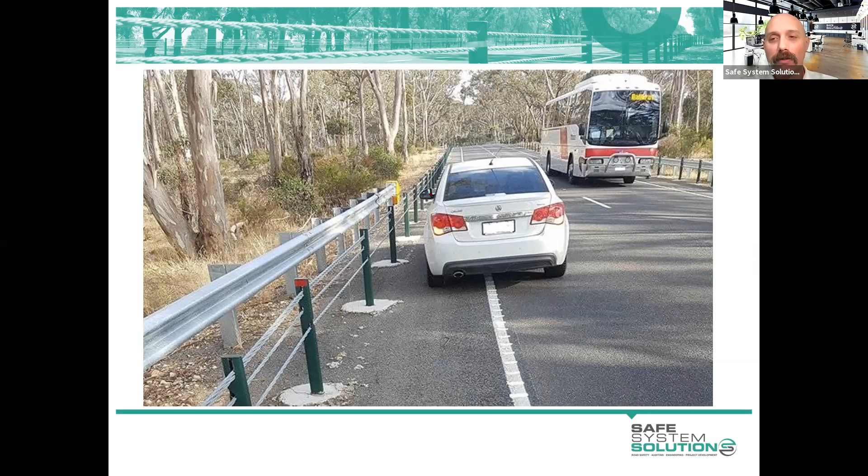And these sort of pictures tell the story. The actual reality of the risk is fairly low for people who break down and have to straddle into the lane. But there is a risk there, and it's unacceptable to the community. So we need to just design and manage that.

Actually, before I jump into just one device, which looks at the severity of crashes, I might just take a pause to see if there's any questions or comments at this stage, Kathy.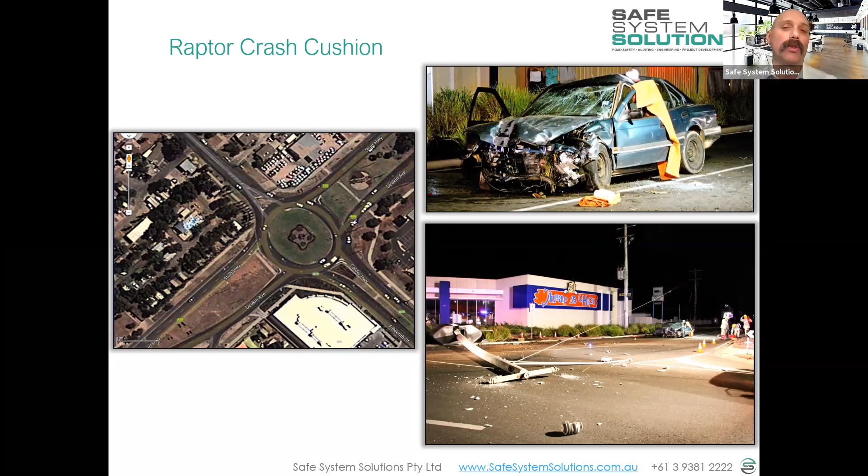Okay. So Raptor Cushion is just one example of another product that's really addressing that severity of crashes. For those who aren't familiar, a Raptor Cushion is a product that sits around a power pole, and it has a bit of cushioning to it, but it predominantly provides its severity reduction by the rotation and the deflection of energy. So as a vehicle leaves the road and hits that, it rotates and pushes the energy or the vehicle away from the point source hazard being the power pole.

And I often use the analogy, it's like martial arts, where the energy of the punch is deflected away. Not that I have ever done martial arts, but I watched the Karate Kid, so that's the answer.

But again, it's thinking about how do we manage the energy of this crash, so it's not an instantaneous redirection of the energy into the occupant of the vehicle. And so, I think a wonderful example of a feature that does this. And I picked that one because it's obvious, but there's many ways that we can be doing this, and I think it's the area for us to continue to innovate. Energy management within the system.

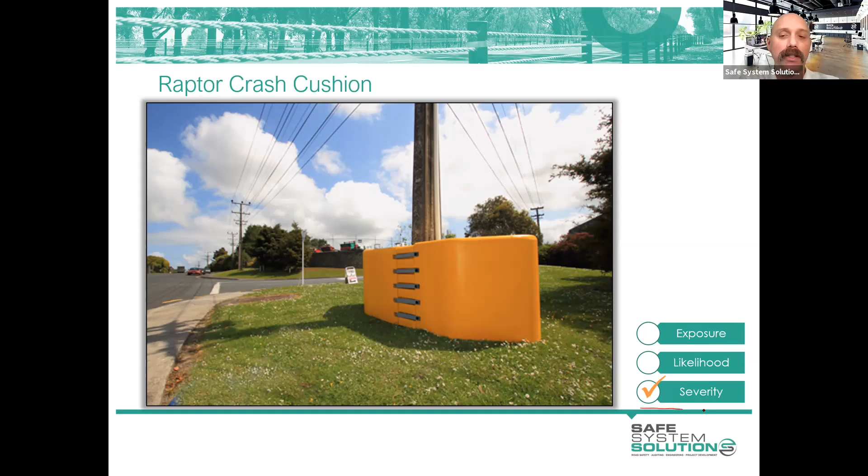And again, here you see that this is severity. When you're doing a safe system assessment, if you see that they're planning to put Raptor cushions around these, you're altering the severity of the crash. You're doing nothing for the likelihood of the crash, because them leaving the road and then hitting that's the crash. You're doing nothing for the exposure to the crash, because that's the number of vehicles that are there. You're just addressing that severity.

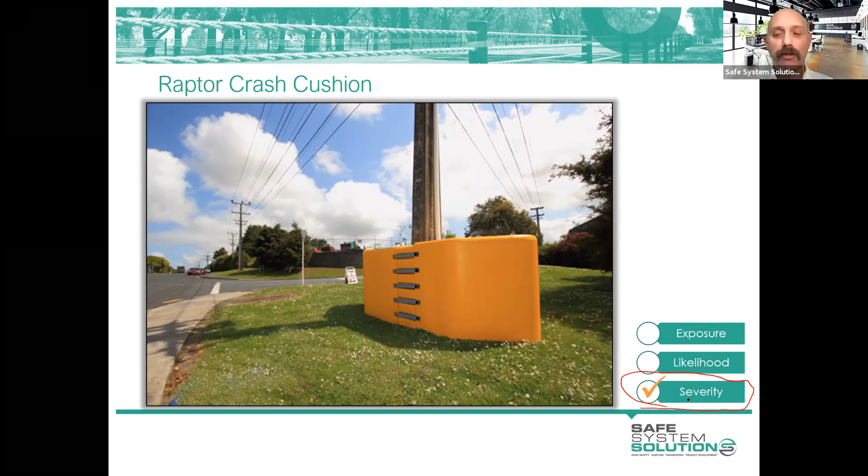Quiz time, and then I'm going to tell you a little assignment that you're going to have to do. You're going to have a little bit of homework, but don't get concerned. It's not a lot of homework. So let's just pop up our quiz there, Kathy. I think it's only one question again, just to check you're starting to get your head around some of the stuff we're talking about. And the question for anybody who can't see it: sealed shoulders improve road safety, true, false, or unintelligible question.

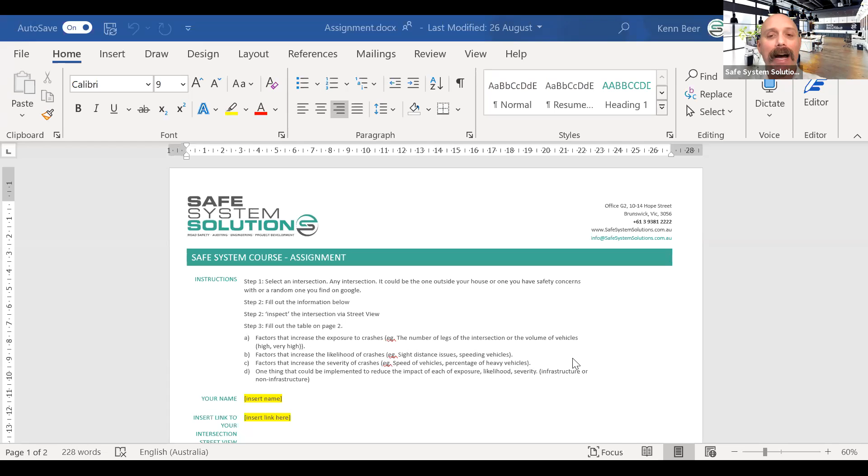What I'm going to get you to do after this module is, yes, you're going to have to do the quiz, and you've got I think 9 questions or something to answer, and one will be how many Wallies did you see? How many times did Wally appear on the slides? And you get a little bit of tolerance with Wally, as you would have discovered last week. But the next thing I want you to do is a fairly quick little exercise, which is not that dissimilar to the intersection challenge we did, but it's actually a lot easier and quicker.

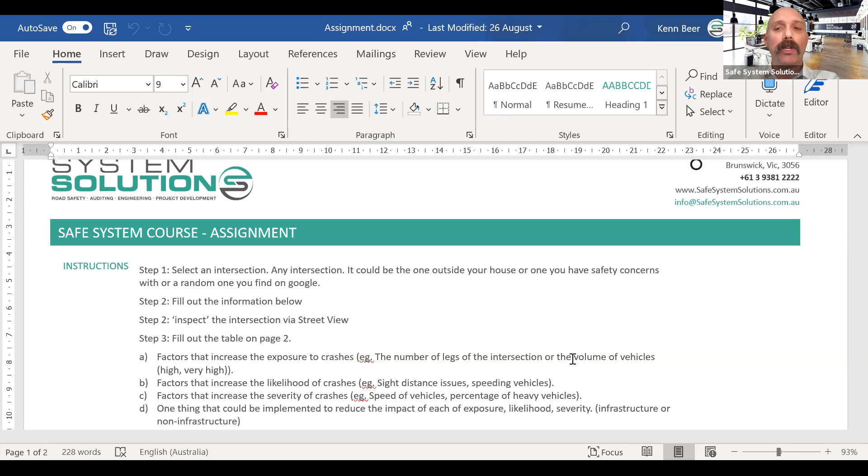And in Schoology, on your memory stick, in Module 2 folder, you will find this Word document. And all you're going to do is type a few words into this Word document and then upload it to Schoology. And Kathy can help you with that if you have any challenges. And if you really can't work that out, you can email it through as a last resort. But we do want it uploaded in Schoology. Ideally, PDF it and then upload it. It's just easier for us to read at our end. But there's instructions in here.

It says that the first thing we want you to do is pick an intersection. It could be any intersection. It could be the intersection out the front of your house or out the front of the office. It could be an intersection you remember from a holiday you're on that you thought was particularly dangerous or particularly good. Any intersection will do. It doesn't matter. You fill out the information that's highlighted and then you inspect the site.

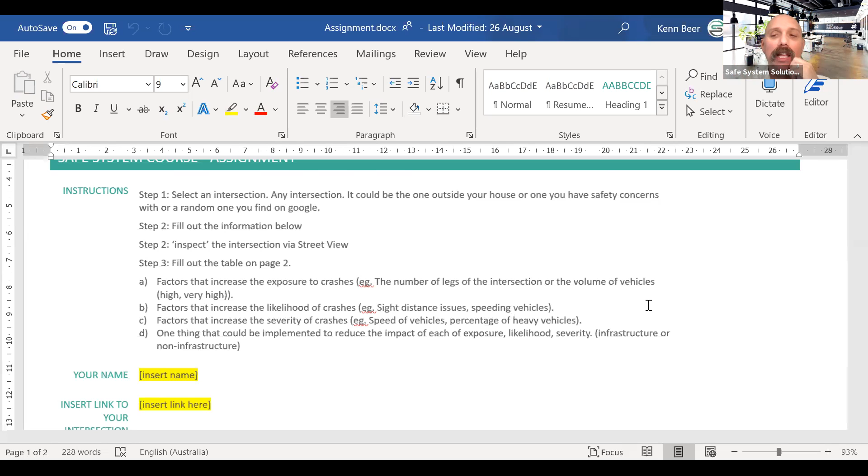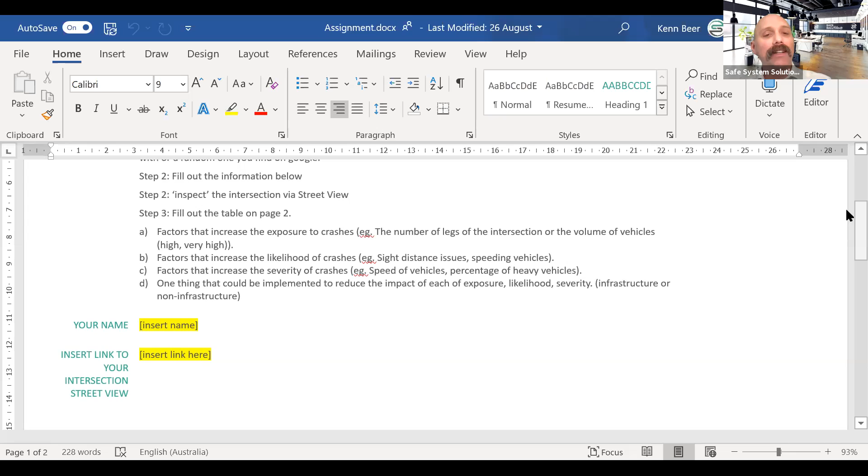And we're just going to let you do this by a street view this time, or photos or whatever, so you don't need to physically go there. If it's out the front of your house, you probably can easily have a look at it that way. And then we want you to fill out the table that's on the next page. And that's all you're going to have to do. So the highlighted bits, you're going to put your name, you're going to chuck a link to the intersection, so when we go to mark it, we can have a quick look at what you're talking about. And then you're going to fill out these very simple 6 cells of this table.

The first thing you're going to do is factors that increase or influence exposure to crashes. And so minimum 1, maximum 3. Now, we've been talking about this a lot. Exposure is the number of vehicles, the number of pedestrians, the number of cyclists, the number of motorcyclists, whatever it is. So really what's influencing that is going to be the volume, or it's a high volume road, or it's got a lot of pedestrians because it's on the desire line from the station to the shopping centre or whatever it is. But that should be very easy for you. It's going to be something related with traffic volume or pedestrian volume or cyclist volume.

Likelihood, again, 1 to 3 factors that influence the likelihood of crashes at this intersection. So that could be anything, like the sight lines to the intersection, the sight distance or the presence of signals or the skid resistance or faded line marking or confusing signage, all of those sorts of things are likelihood factors. And then severity, factors that influence the severity of the crash. And we said they're most likely going to be the speed, the angles, the vulnerability of road users, the point source hazards or those sorts of things.

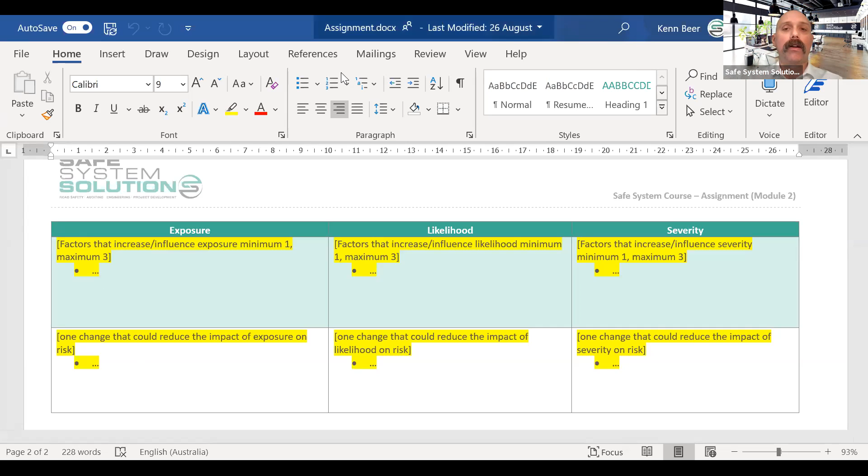Just waiting for some questions to come through. Now's a good time to ask them. Well, I like the question, Kathy, if others aren't going to ask it. When's it due? Good question.

Thanks, Ken. So before our next session, ideally, which is next Tuesday. So really what we want to do is get this from you so that Ken can have a look through and give you some feedback before you head out to do your safe system assessment. So that way we make sure you've got it, you're on the right track. So ideally by next Tuesday, and as Ken mentioned as well, if you've got any concerns, just give us a call.

Can you give us some more examples of lowering the exposure of an intersection, Ken? What else have you got? So to address the exposure to an intersection, you would have to either eliminate that exposure through a grade separation, or you would have to block off parts of the intersection, to bring the number of vehicles going through the intersection down. So that may be to close a side road off, or close some side roads off, divert them to other intersections or the like.